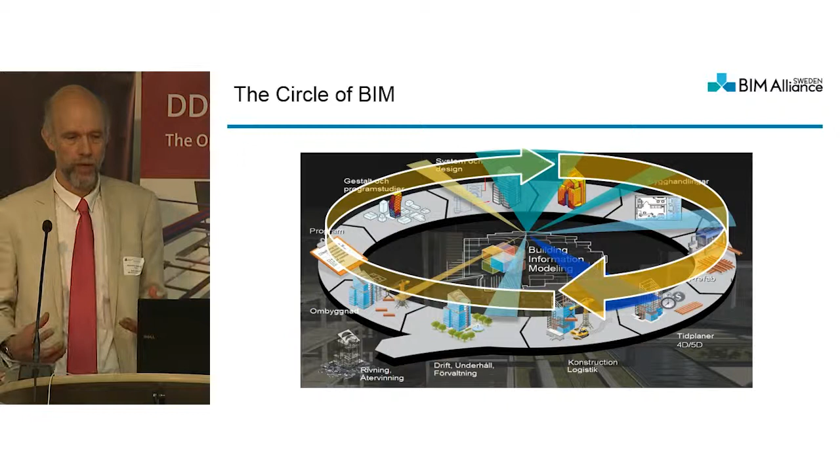As things go, there are some parts of the process where BIM can very easily be applied, and you get benefits out of it already. And then in the long run, we have to see that these parts fit together, so we have a life cycle perspective on information. This is of course a long-term success of BIM, to have it integrated throughout the entire process and involving all the actors of the sector.

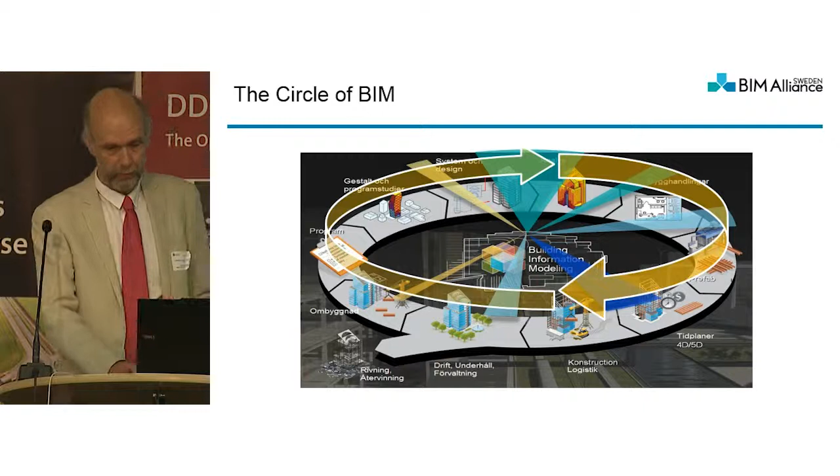The driving forces in Sweden differ a bit from what exists in other countries in the Nordic and internationally. BIM development or implementation has been very much relying on big companies introducing in projects, big companies that have the capacity to develop the practice and the capability to drive advanced technologies in big projects.

Things are then kind of petering down from these big companies and big projects into the entire sector. And that's also kind of a goal that we have, to have broad application of BIM rather than these cutting-edge projects only.

So there is a tradition of sector initiatives, associations promoting the use of technology in the construction sector. And all the actors in the sector are in some way or another connected to these initiatives. We have had two large development programs during the 90s and the early 21st century. And now we are going on with this BIM Alliance after a period where things have been going on in a number of smaller associations.

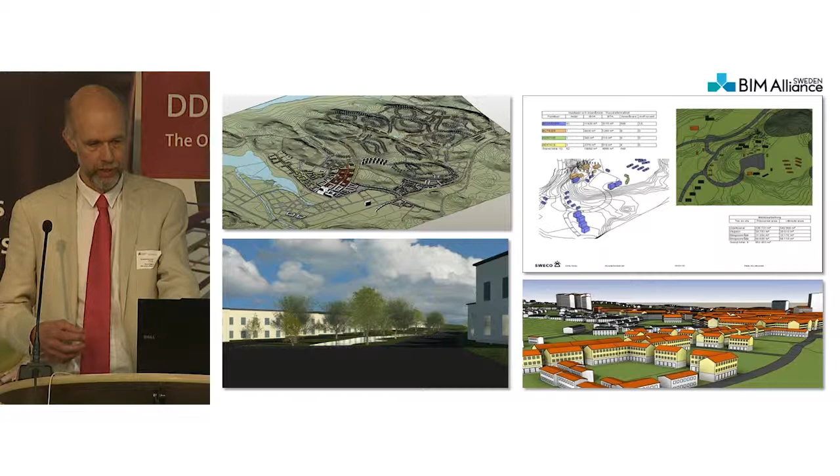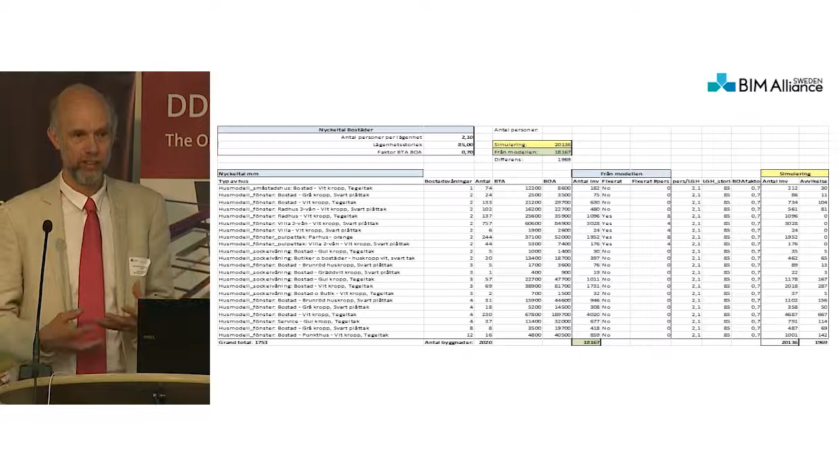And then from that you get an analysis that shows what will this mean to the development of this society. How many inhabitants will we have here? What are the requirements for schools and transportation and things like that? And it can be dynamically changed during the ways. So that's a way of expanding BIM from the technical specialists to the entire field of actors in city planning.

Another example from a project for a hospital extension in Sweden, in Stockholm, where there was a model, a 3D model with not so much BIM into it, but 3D issued by the authorities, and all the companies that were participating in this competition for designing the hospital had to enter their proposals into that same model. And that actually meant that the client here had very equal proposals in respect of how they were presented, and resulted in that quite another proposal was selected than what it was initially thought.

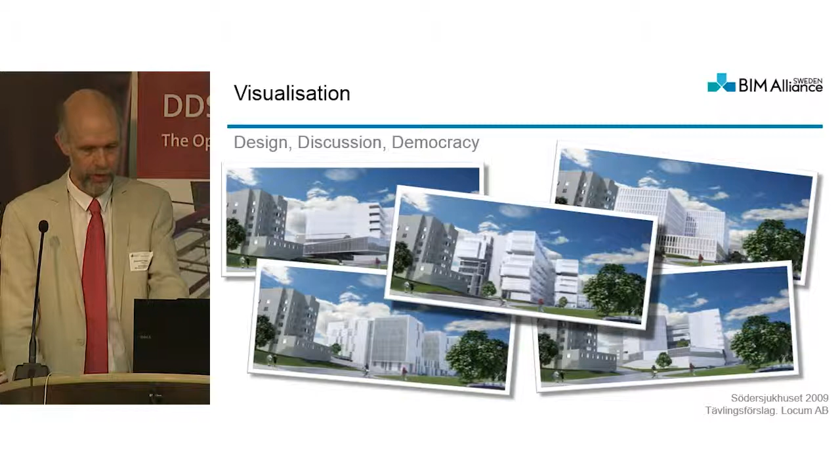So that's one example. Another of how BIM is taken into a bit of new areas is what's called the paperless bridge project. This is not a big prestige project. It's quite a small bridge that was to be rebuilt, and the National Transport Administration required for this project to be modeled in BIM, with the goal to have the information used for procurement, for construction, and for maintenance and operations, with the idea to test whether this was a profitable implementation of BIM.

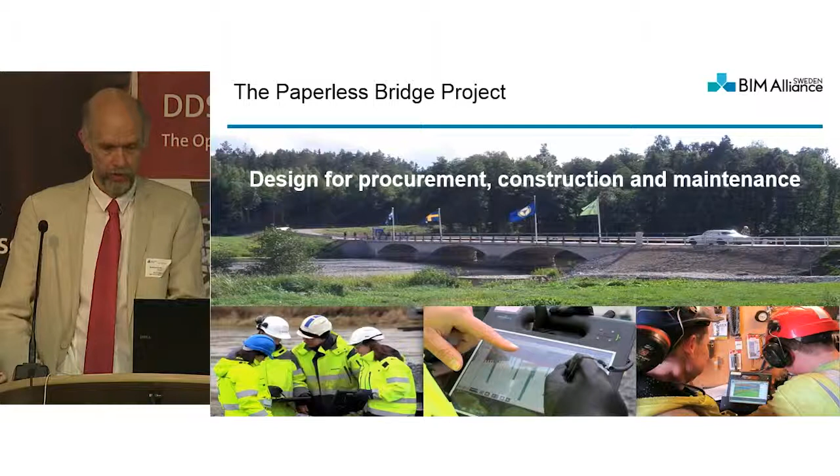It was in fact very successful. The effect of this was that the production went much more smoothly. There were fewer disruptions than usually in this kind of project, and the project costs were quite reduced and much better controlled. Above all, there were very few additions to the original costs in this project.

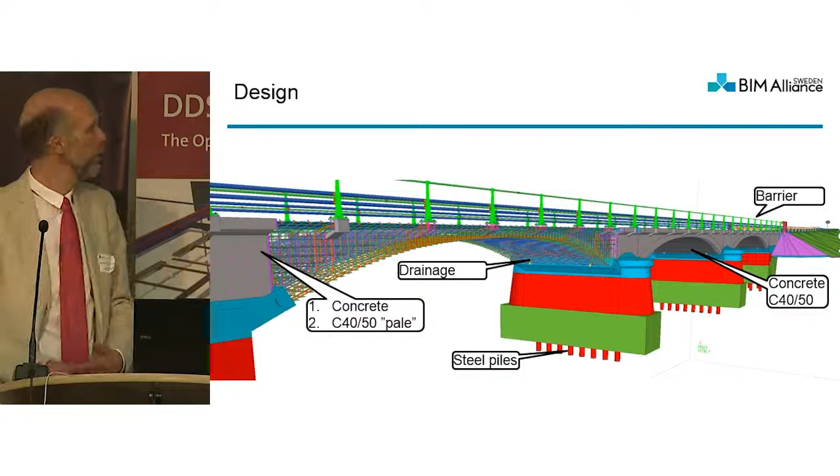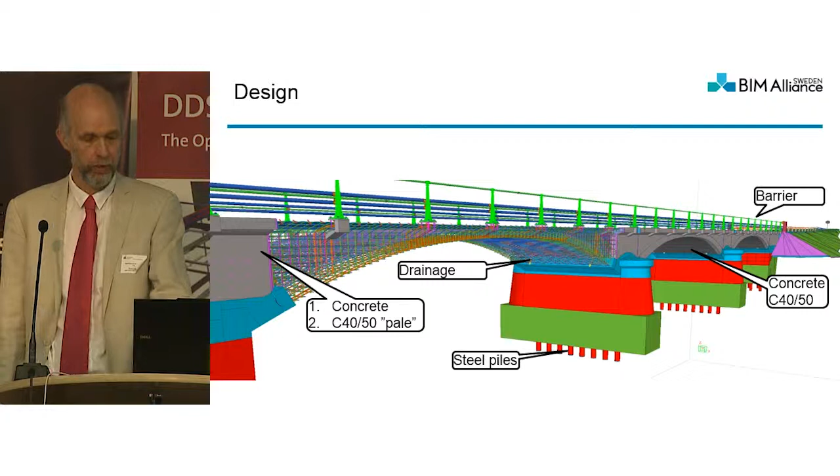And as you can see, it was very detailed, modeled in detail with geometry as well as all the properties needed for this. You can see here how one single element was modeled and its properties that adhere to national standards. That's one very important thing, that we have this tradition of common standards and guidelines for construction design that are now applied to BIM and have proved very effective in that sense.

There's the classification, the guidelines for presenting information, for layering, CAD layers, which are also used for BIM, for categorizing rather than layering now, and also for specifications based on the classification standard, BSAB.

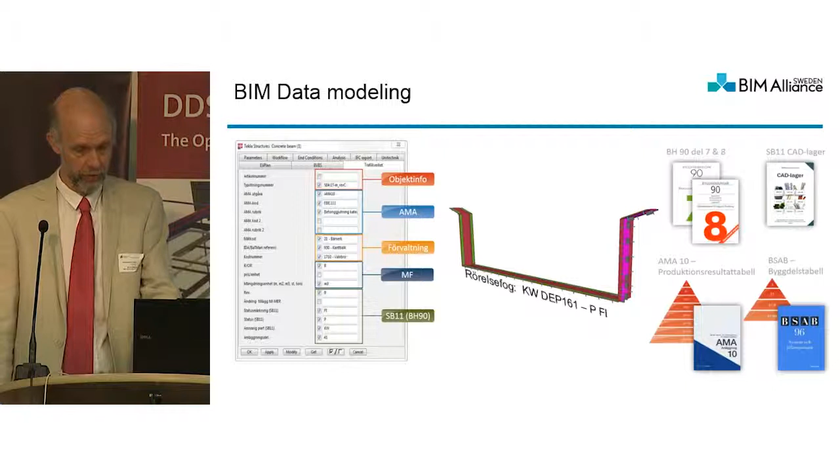So this history has proved beneficial to BIM, that we have this classification dating from SFB to BSAB, and now a third generation of classification is being developed based on BSAB and the ISO standard 12006 Part 2, for those who are interested. So we will also then have a classification that covers not only the parts of the building, but also the properties of the parts of the building.

Sweden has also always been very active in standardization, very early with Swedish standards, and later we've been promoting standardization in ISO with the Swedish standards as an example. And lately, of course, when Building Smart and OGC have taken up speed, Sweden has been there and intends to be there even more.

Actually, this association, BIM Alliance, is very much going into standards and open BIM, not proprietary BIM at any part. The national guidelines include the Bygghandlingar 90, which is the presentation part, the documentation part. We have the specifications, and also, not less important, the contracts, the legal part of managing information in projects.

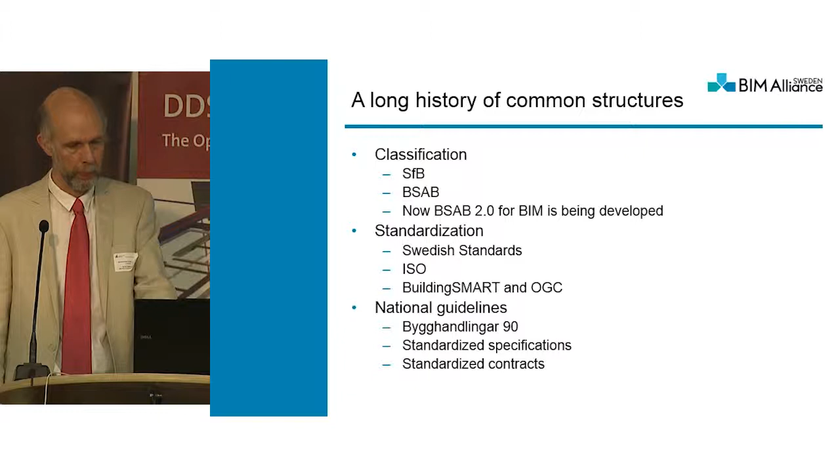Illustrating with one more project that has been very important for the growth of this practice, it's a big hospital project in Stockholm, the NKS, Nya Karolinska, where Skanska won a contract for construction and operations of this hospital. So they were forced to form the information for the operations phase as well.

A number of consultants, smaller and bigger in Sweden, were involved in this, and together with the contractor, formed a method for managing all the objects and their properties and the systems they were connected into. Based on IFC for transfer information, but then developing property sets specific to what was needed here. It's a bit special, and it's still being a dialogue in the sector how to develop the property sets. So it set focus on the information, really, on a large scale for the first time.

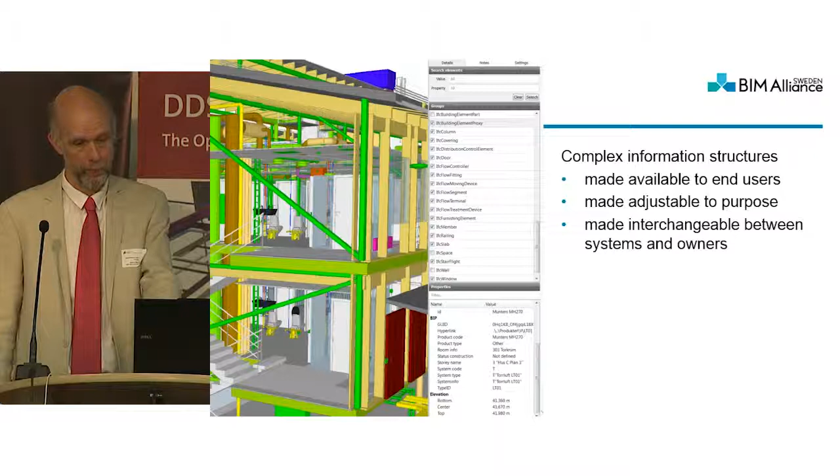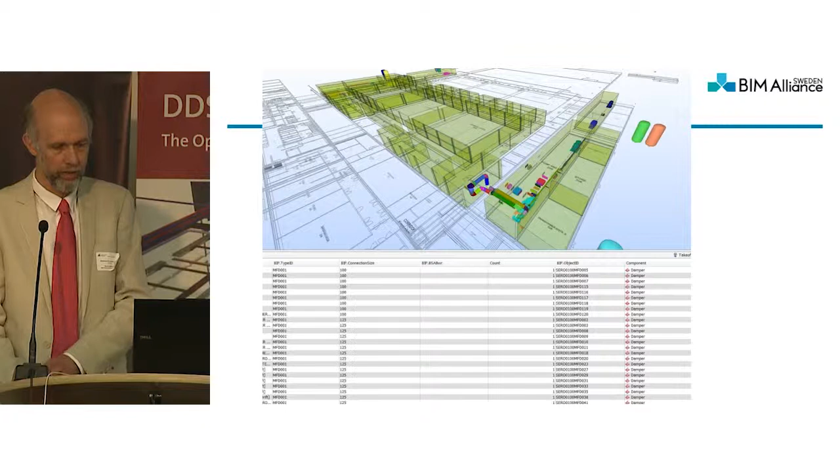So this project has resulted in many more, and also in cooperation initiatives that contain agreeing on these properties, these codes, which are called the BIP codes. It's not at all restricted to the health sector, but used in quite other places too, like a server hall for Ericsson. They're just like the big actors in IT, building server halls all over the world, and have adopted this. Still developing, of course, and we are trying to introduce the thoughts internationally as well, and to see how IFC can be adapted to have very adjustable property sets in the model views.

So this is the maintenance view of this server hall, showing one kind of component filtered out.

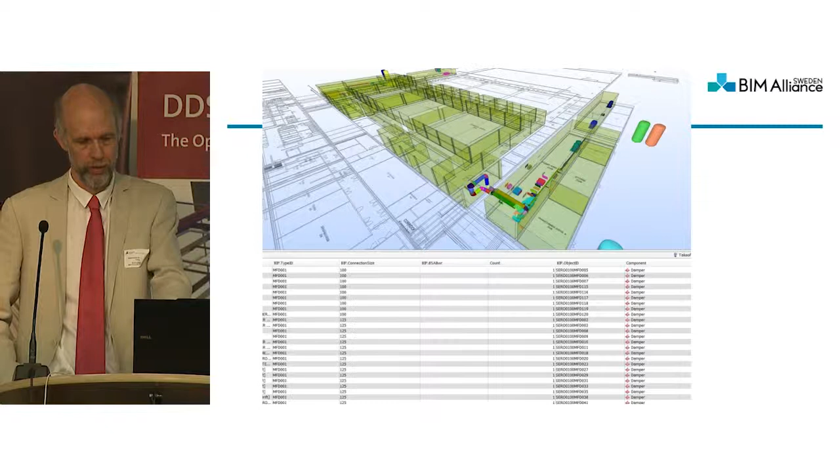Okay, so I'll just say a little bit about what BIM Alliance Sweden really is. It was formed from three associations dealing with information for property management, dealing with BIM implementation nationally, the Open BIM Association, and also the Swedish chapter, or Swedish part of Building Smart. With the common goal now to maximize the BIM benefits from using BIM by cooperating on the national level.

The tasks of BIM Alliance are to drive implementation by informing, education, and so on. Also to manage and maintain the industry standards and tools used. And thirdly, to develop the processes, the methodology, and the standards and tools as well.

Within BIM Alliance, there are stakeholder groups active in different areas. These altogether consist of somewhere between 100 and 150 persons, gathering people from the sector. We have a technical board that gathers the initiatives from these stakeholder groups and transforms that into projects for standardization and common guidelines.

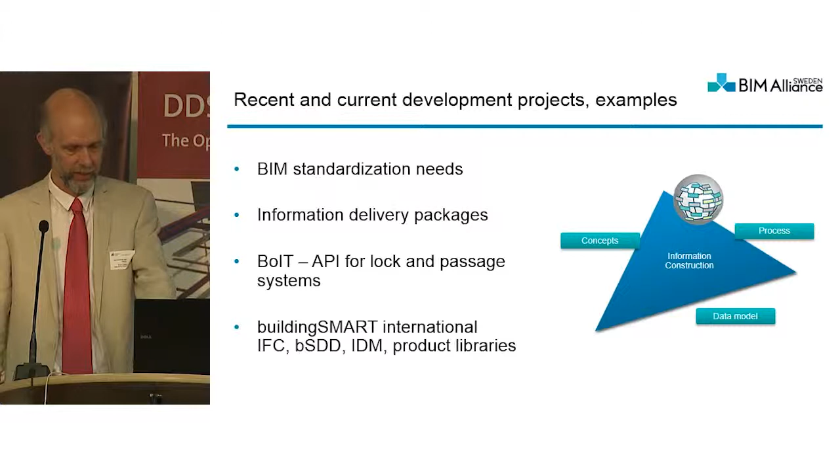There are some projects ongoing, like defining the standardization needs, and a project for defining delivery packages, or data drops as they're called in Britain. There are more specific projects, like building an application programming interface for lock and passage systems for the property sector. We're also accelerating activities with Building Smart International and OGC, intending to take active part in development of IFC, the Building Smart Data Dictionary, IDM, and product libraries. So we're getting into it very actively.

The first project, on standardization needs, has resulted in a roadmap containing 10 projects to improve the implementation and use of BIM, ranging from national BIM guidelines to different kinds of more detailed implementation of BIM and GIS, not least.

There have been some crucial parts of the process we intend to focus on, or interfaces between IFC, or between BIM and GIS is one, focusing on the planning phase as well as the construction phase. Another is the industrial construction part, to integrate the construction companies and the materials or manufacturing industry, where currently work is done in very different ways.

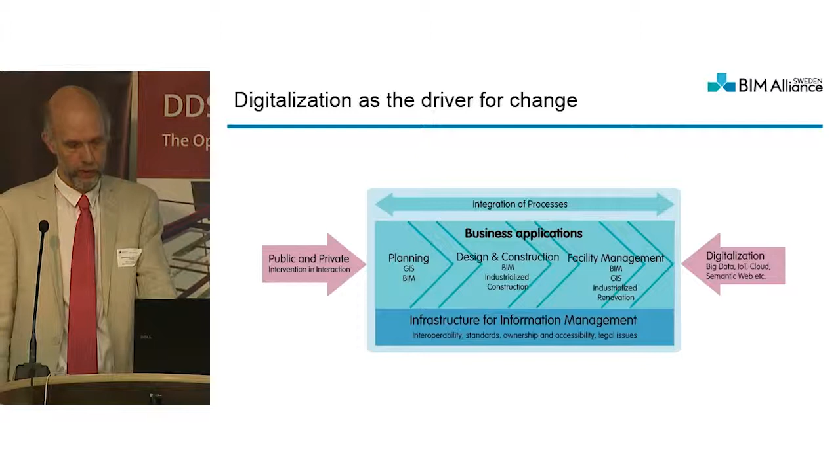Finally, I'd get back to a more traditional picture. There is a vast experience in presenting things in drawings, and let's not forget that, because a drawing is a view of the reality we face, existing or planned, and the objective of the drawing is to convey a message and be technically accurate. Those are two things we need to stick to.

We aim at using the drawing and the BIM model for designing the right building, to realize the design and to use it over and over again. The building will be used over and over again, and the information should always also be possible to use over and over again.

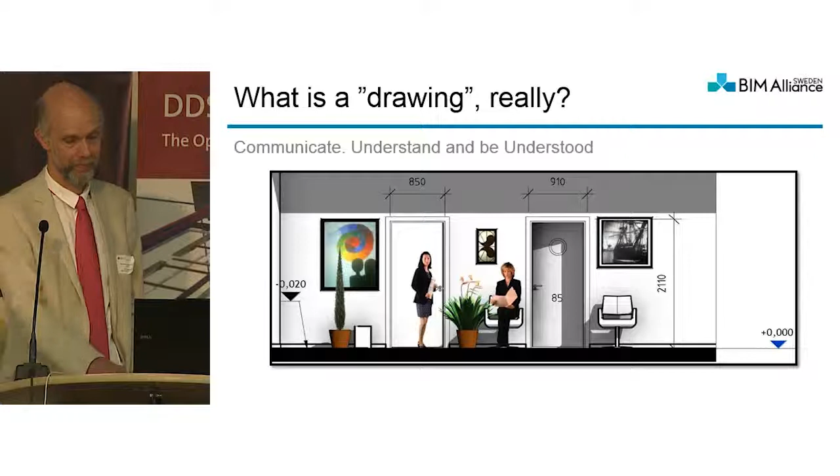Now, how does it fit with BIM? The drawing is a presentation suited to the purpose, and it's available anytime to those who need to use it. When we're talking about BIM, the task for the BIM community is to make the same things possible, and to realize the added potential of BIM, to have good information available at any time to everybody who needs it. Well, thank you.